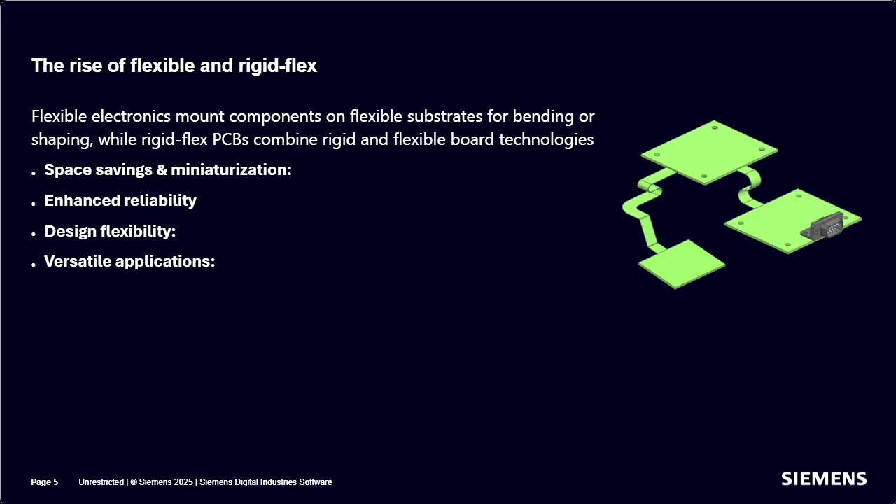This happens to be an area where Siemens has very capable software product offerings. NX, for example, allows for the design of both rigid and flexible printed circuits, enabling the creation of complex electronic systems that combine the benefits of both technologies.

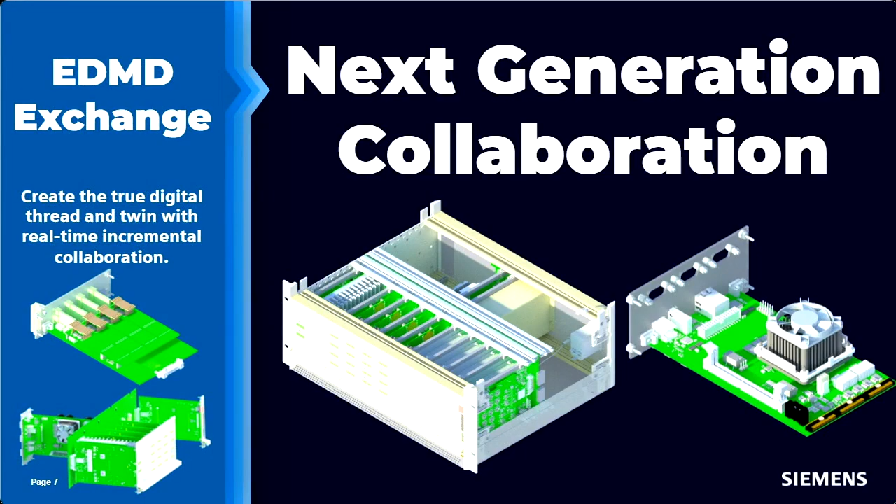And I think the bottom line of all of that is products are getting more complex and need to be tightly packaged. And the way we address that is to make sure that our domains between the electronics and the mechanical world are better integrated. So we asked a question at the start: how do we go from the chaos of not knowing what's going on to a regime where things are understood and everybody has visibility?

So if we do remove the chaos from the process, and I talk about chaos as emails, conversations, screen grabs, post-it notes, we need something to replace it that we can rely upon. So we're introducing EDMD Exchange. But what does that actually mean?

EDMD Exchange refers to the collaboration process between disparate domains, in this case, electronics and mechanics, MCAD. You may have moved on from emails and screen grabs and using historic basic methods such as IDF, but you want to go further, really embrace the connectivity between domains. At the basic level, you have the exchange of the board geometry and component positions. Usually the components are represented by solid blocks. We refer to those as 2.5D blocks.

Maybe you want to see the copper traces on the mechanical side. Take the example of a Bluetooth antenna. Simple copper on the surface of the PCB that's so important to make sure no mechanical components obstruct it. Wouldn't it be great if you could see it while designing the housing? And then 3D models visible in both domains, true representations of mechanical parts in ECAD and electronic components in MCAD. So we have it all, right? Okay, but how does it all fit together?

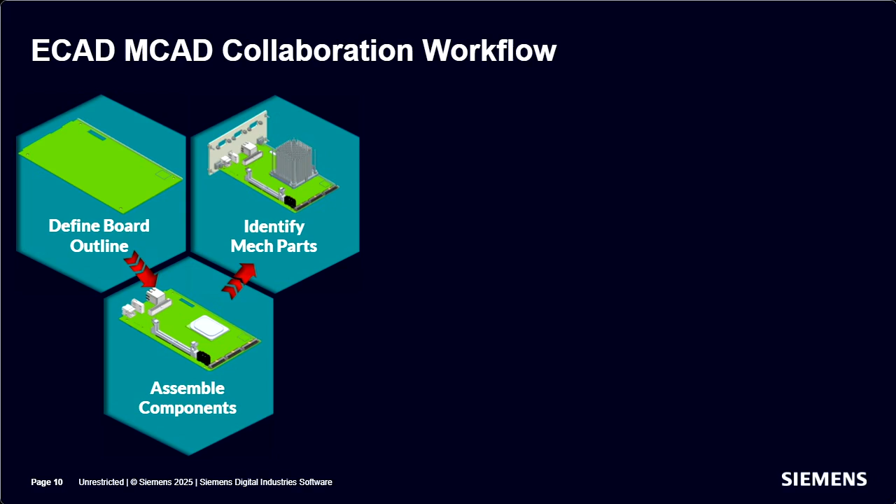So I'm going to take you on a little journey through a typical collaboration process so you get the span of what's going on, and then we'll dive deeper later on into some real-life demos of the actual process. First, we define the board outline. Usually it's recommended that this is done in the MCAD side, but it doesn't have to be. We add the electromechanical components. Generally, these would be those components that define the board interfaces to the product assembly, the enclosure, the connectors and the like. As it's typical design in context, the product assembly already exists, defining the interfaces and constraints for the board. Now it's time to collaborate.

We send a baseline to the ECAD domain and bring along the mechanical components for full visibility in that ECAD domain. The layout designer will add the electronic components defined by the schematic and propose these changes back to MCAD. The mechanical designer now reads these changes, decides if they should be accepted or rejected, and sends back a response of this decision. This part of the process can iterate a number of times until the final design is agreed upon. Iterate now rather than board respin. Once agreed, the final copper traces can be laid down and sent to MCAD. That's the full realization of the design in both domains.

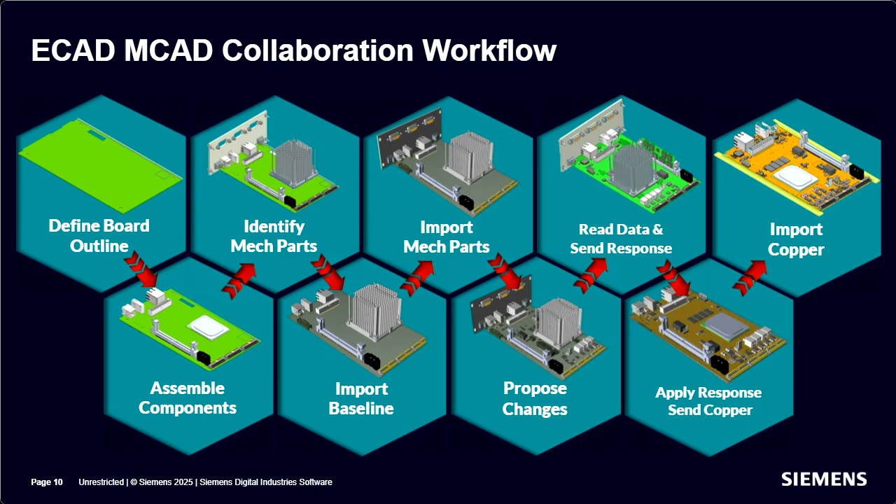So what we're going to do now is take you through a number of different design stages and step through these, starting with the board geometry. And as we go through, we'll reveal what each of the other steps are, but all the while following the process we just saw. Nice animation here. What we're going to do now is take you through a number of demonstrations. And before we jump into that, let's start with the board geometry as the first step there.

So we've got a pretty comprehensive list in terms of the things that we can collaborate on. The board profile, the thickness, the cutouts, and so forth. So there's a lot of capability within the generic design of the board that we can define here to make a very rich data set. You'll notice at the bottom there that we've got flex and rigid flex definition, where we can really define on the mechanical side the true mechanical profile, outline, and thickness, including the stiffeners and adhesives of a flex or rigid flex design before we proceed.

So our first demonstration is going to be about how to create the board geometry. So let's have a look at that. Dave, it feels like time to see this in action.

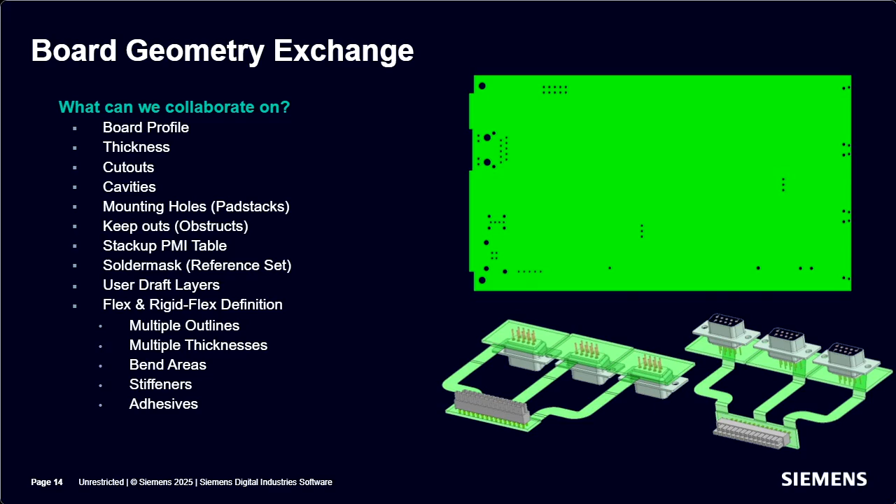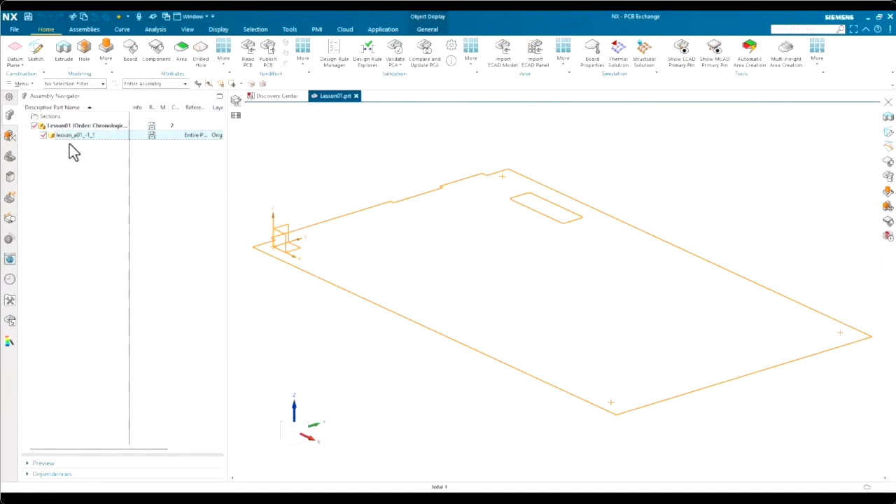Fantastic. Thanks, Greg. Okay, so let's create the board and see exactly what we're going to do there. So what I've got here in NX is a top-level assembly and a board, which is one of the components within there. And I make that the work part, and we can work into this particular area. I've created the board profile just using a sketch, and it's got a cutout and a few other features in there. And we just generate a thickness for this board. We pick the area, we define the thickness, and putting this in the negative Z direction, we want the datum to be on the top surface of the board.

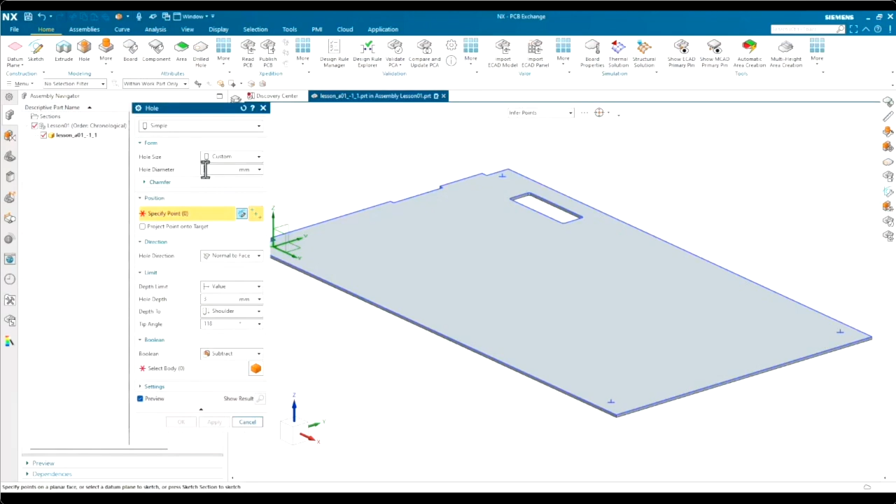Next step, let's put some mounting holes in there. So once I've got a definition here, what I've created is actually linked points from the enclosure. Obviously, you can't see the enclosure in this particular design. And I just generate the hole features for each of those mounting holes. And once those features are complete, we can then start to look at how we tell NX about the aspects of the design for the collaboration.

So the first thing we need to do here is to define the board profile. So what we do here is something called tagging. It's an attribute that's added to the geometry. We pick the coordinate system, which is the orientation that the ECAD designer will see it. And I go on to do the same thing for the holes. I can pick the holes up en masse. I don't have to do them one at a time. And these are non-plated holes for the mounting to the enclosure.

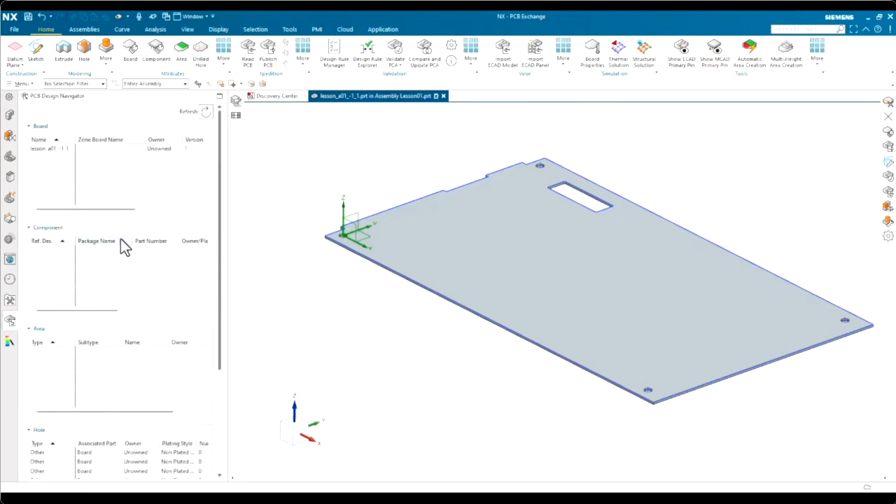So what I've also done here on the next step is that I've generated a couple of sketches, and these represent some no-go areas, some restriction areas, some obstructs, depending on your preference in terminology. And we define these as an area. So I've got a placement obstruct here, which is to prevent any electronic components being placed in that area, and that's communicated to the ECAD side.

I've got a separate area here, which is a special area, and we do some name alignment. And I've got a user draft layer 1, which is a name match to a special area on the ECAD side, such that the ECAD side can understand what to do with that. Greg.

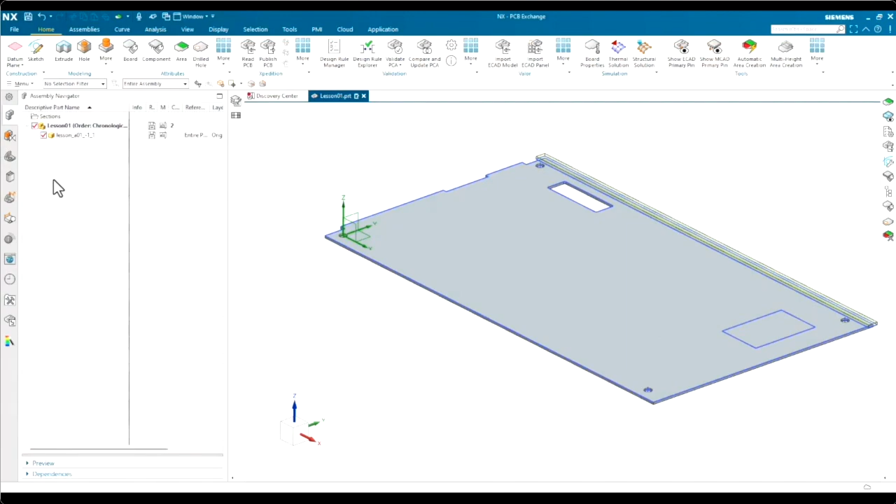Thank you, Dave. You know, watching that there, it really strikes me how easy it is to get your board geometry ready for collaboration. So now we're going to go into the next section, and this section is going to be about the component exchange side of things. But what does component exchange actually mean? Over to you, Dave.

When we talk about exchange, it can mean many things. So let's dig a little deeper. Electronic or ECAD components, so that's ICs, resistors and the like, that's clear. Mechanical cells are a special case item that have a 2D definition that the ECAD designer sees. We then have assembly models which can be pushed across to the ECAD world, and we'll see that later in a demo as well. It gives huge benefits when checking the design for issues on the ECAD side, and so on through the different capabilities to the final one there that's about understanding PCB variants.

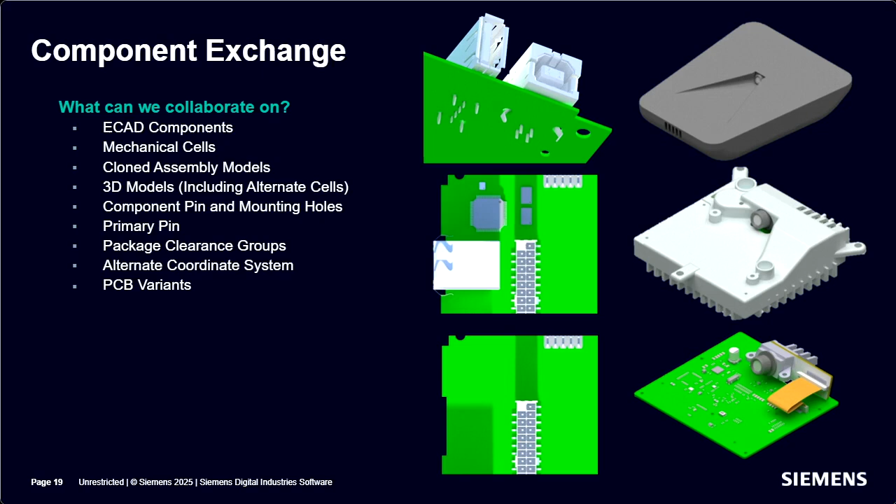In the electronics world, PCB variants are clear for different component fits and do not fits, but to see that on the mechanical side is something truly impressive, and that's something we can also support there. So let's look at a very simple example of placing ECAD components.

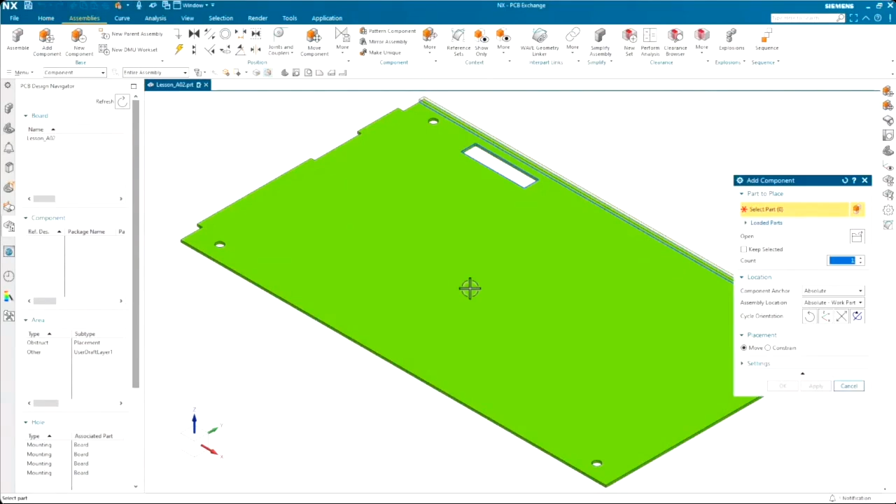So this is the board that we prepared earlier, and it's typical for the MCAD user to place components that interface with a mechanical enclosure and other system components. Using the add component command within NX, in this example, we know the location of the connector specifically, so we can dial in the coordinates. But this doesn't have to be the way that it's always done. We can use constraints and alignment to other mechanical items around.

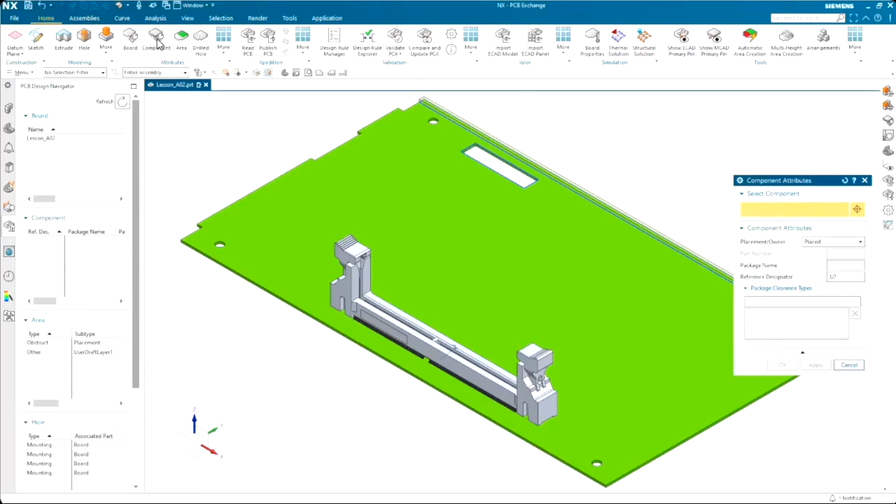Similar to the board and the holes and the areas, we can define the attributes, telling NX and Xpedition what this particular component means. And we define the reference designator as defined on the schematic. We can define ownership to prevent the wrong person from moving it. Package cell outline for clearances can all be added here. And we repeat those steps for each component. There are more automated ways of doing this when the BOM is uploaded to Teamcenter in a managed environment, of course.

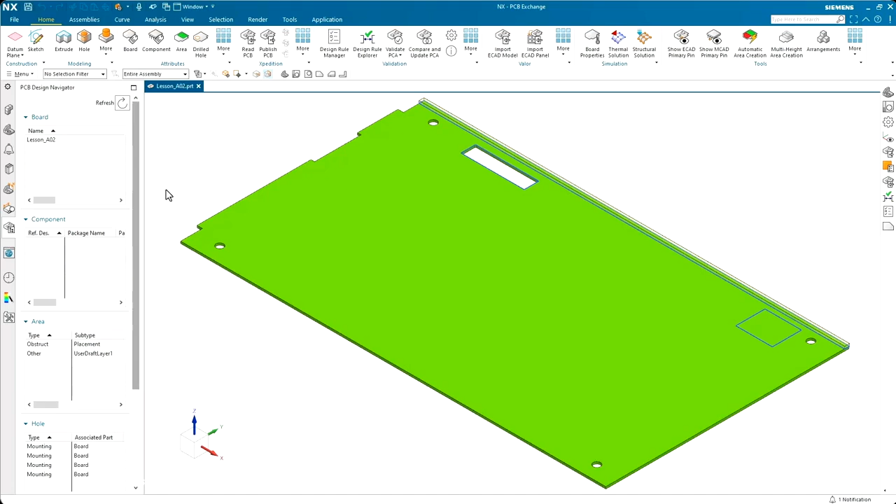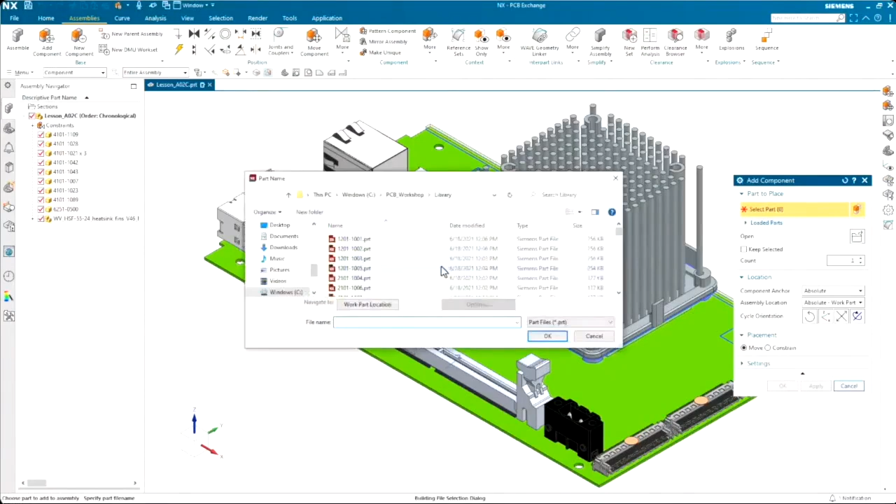So on to component placing assembly models, sorry. So we mentioned about the mechanical components earlier. So we've taken that one connector and added a number of other connectors, and we've got a heat sink there in exactly the same way and identified them. Now we're going to place the mechanical objects. Now, depending on the design constraints, they will already be in place and the board will be dependent on them. But in this particular design, the front panel is attached to the PCB as it runs in on a card guide.

Now, there's no need to add any attributes to the mechanical. NX understands what to do with them and will transfer them to the ECAD domain. Back to you, Greg.

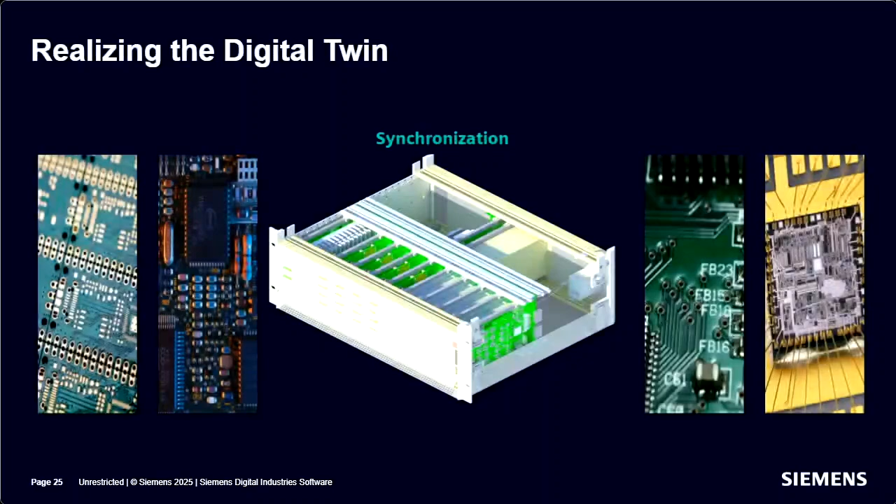Thanks for that, Dave. So we've dug a little bit into detail now in terms of the board creation and how we transfer electronic, mechanical, and even the assembly components between the two domains. But Dave, how do we make sure everything's all in sync as we go through from one side to the other? Right, so let's review that collaboration workflow. The data is synchronized in a process we call co-design. This is a conversation between the two domains using a process of IDX collaboration files that track the history and provide a way to compare and update the design as it evolves.

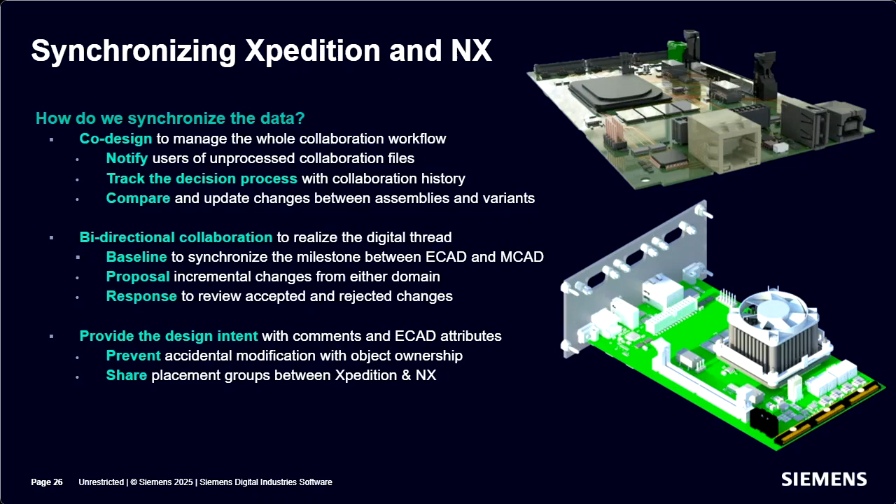The workflow is truly bidirectional, with a concept of baselines to mark the start of the design, followed by proposals and responses as engineers talk to each other through the process of accepting and rejecting changes. With the ability to control ownership, the responsibility for separate aspects of the designs are made clear. And if we dig a little deeper into the Siemens capability, placement groups, for example, are understood in the ECAD world. However, NX is the only MCAD tool capable of understanding and collaborating on this concept. So let's go ahead and create that baseline as we move forward.

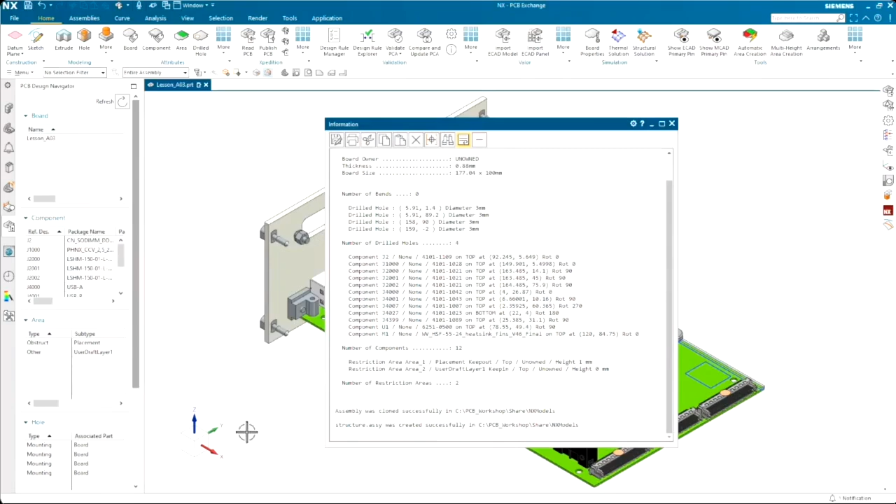We'll take the assembly that we prepared earlier and we'll create the baseline. We choose the file format, the file's name and location, which can be in a managed environment, but here it's just in a native system. And we'll add the option to send the mechanical components. And once complete, the information report can be viewed for successful publication of the data. So we're now going to switch across to taking that baseline information and viewing that inside, in this case, Xpedition in the ECAD world.

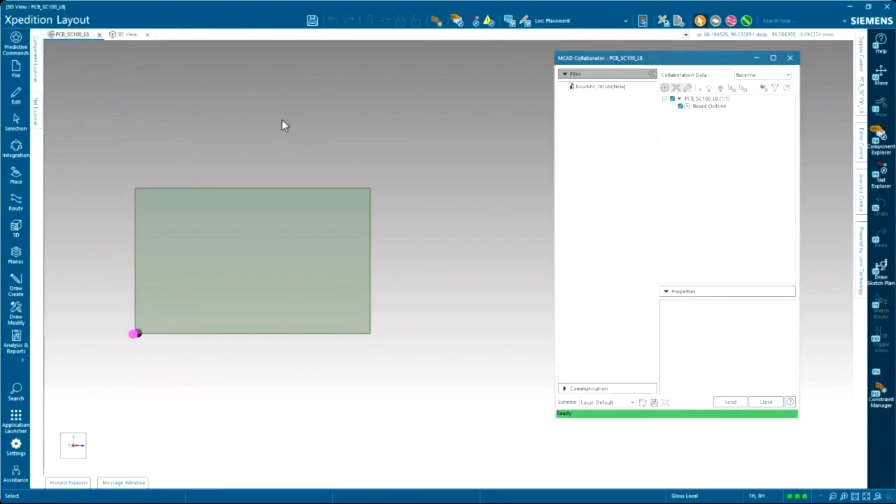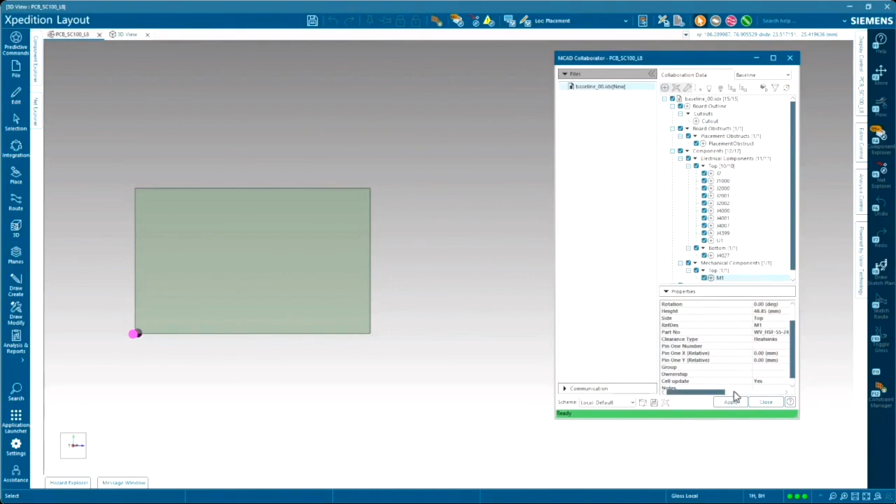So switching gears to the ECAD domain here and take a look inside Xpedition. Using the MCAD collaborator, we can see the contents of the baseline file and review that content. So here in the preview, I can preview the board profile with its image. I can inspect individual components and look at their structure and their definition for each one of the components, the board, the mounting holes, and so on. And this gives us a good insight into the overall design. And when it's applied, we can now see exactly what we had on the MCAD side in the ECAD side. And the baseline communication is complete.

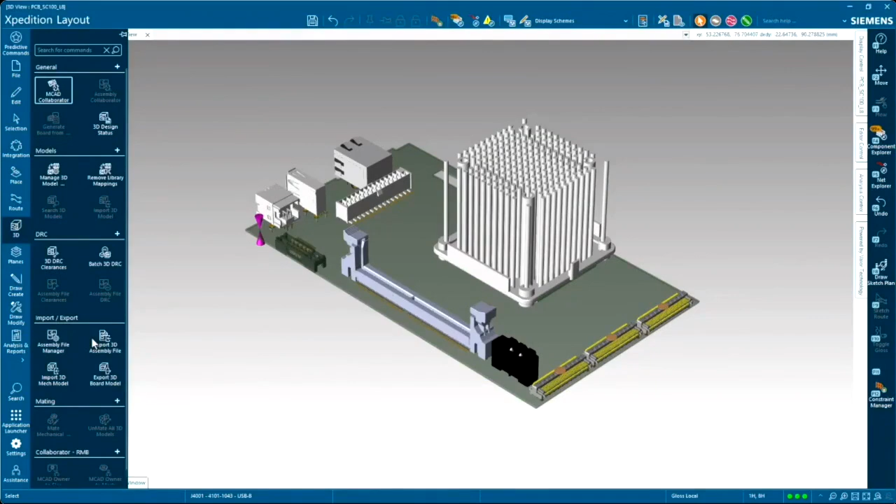Now, we spoke about the mechanical components a little earlier. This is done as a slightly different step. And the way this is done in Xpedition, we load the mechanical items using a load assembly command. When we exported the baseline, we generated this mapping file that says these are the components that you need to introduce into the ECAD world. And you can see there's no moving around or placing or importing of files. We can manage the visibility of those with the assembly manager within Xpedition, and this gives the user the ability to do 3D design rule checking right there on the actual 3D geometry.

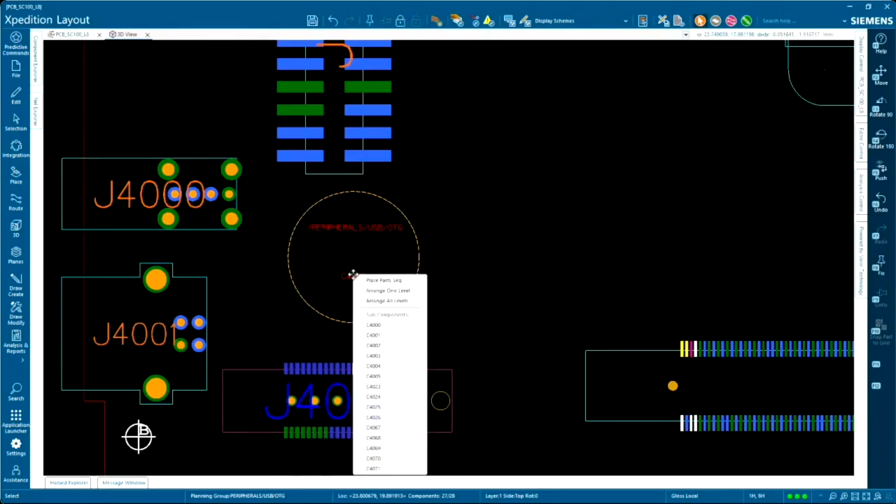So I'm going to carry on now, and on the ECAD side, the hard work starts here for the ECAD designer, where he needs to place the remaining electrical components. And they're placed according to the design. In this quick example, we'll place just a few components rather than the whole design.

Once ready, we can then send a proposal back to NX. And remember, only the changes are sent, not the complete design. The designer chooses what to send, and they wait for a response, or they can continue placing the design if this is an interim send of the information.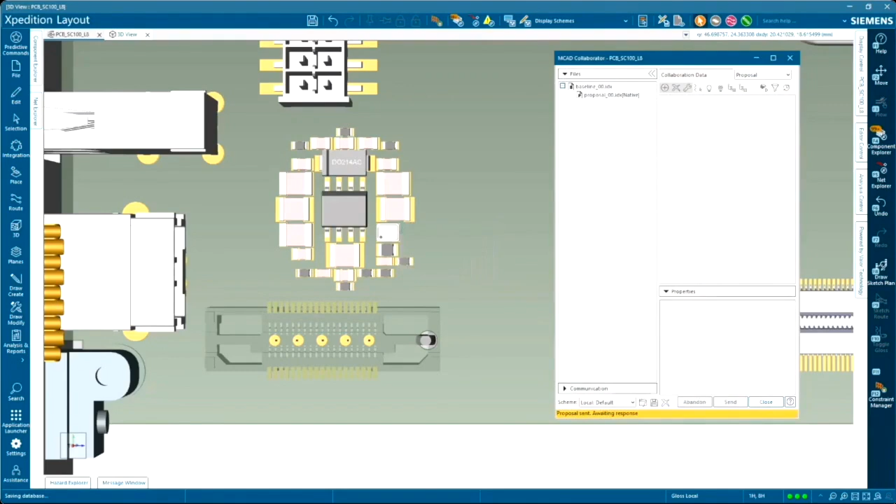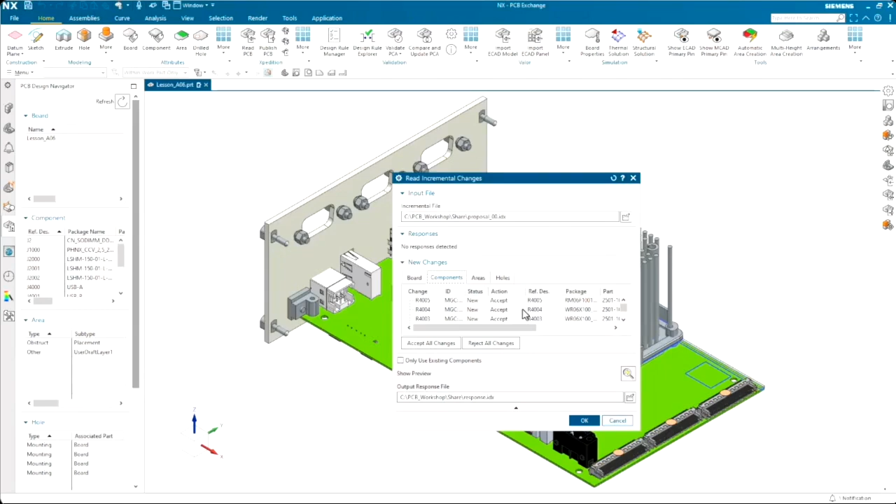Well, once that proposal has been sent, we jump back into NX, and it's simply a case of bringing in that proposal file and reviewing the changes. So when we read that incremental file, we choose the appropriate file. You can see there are board changes, and that's probably due to the layer stack information coming across and changing the thickness. And then we've got all the components, which can be individually accepted or rejected. We're going to accept all of them, pull them in, and you can see those components now.

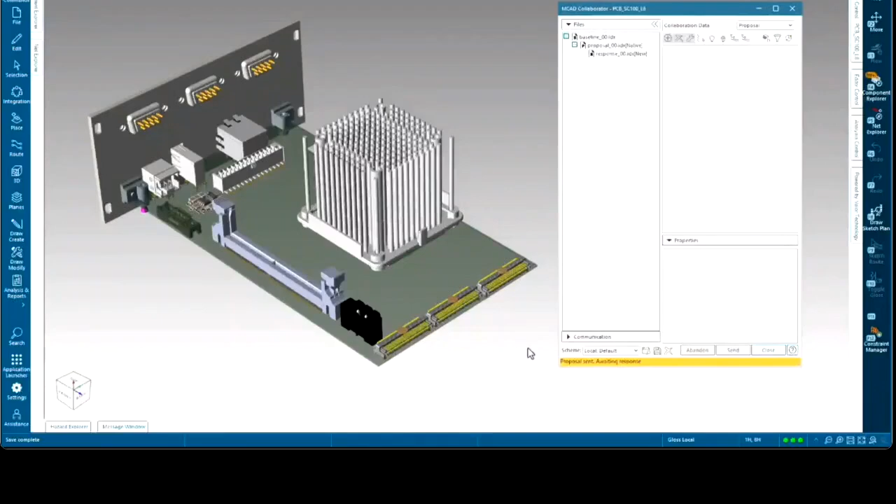And what we've done is we've sent a response file back across to Expedition, who then need to apply that response file to say, I accept that you've received the data and we can now move forward in the process. So we can see in Expedition here, the response file, all of the check marks say the mechanical engineer has accepted his proposal. And once that's applied, the two domains are back in sync and the process can iterate from there. Greg.

Thanks very much, Dave. So hopefully you've seen what we've been talking about here in action right the way through the presentation today. Having the electronics engineer in Expedition being able to see the full mechanical assembly, and if that mechanical assembly changes throughout the design process as that clone assembly data is moved across, it gets updated within Expedition so both sides are in sync. The engineers have the capability to see the changes and keep the design on track.

So moving on to our next segment, we're going to talk about copper exchange. But what does copper exchange actually mean? Back over to you, Dave. Thanks, Greg. Okay, so up to now we've been talking about board profiles and holes and restriction areas and components. But what about the other content?

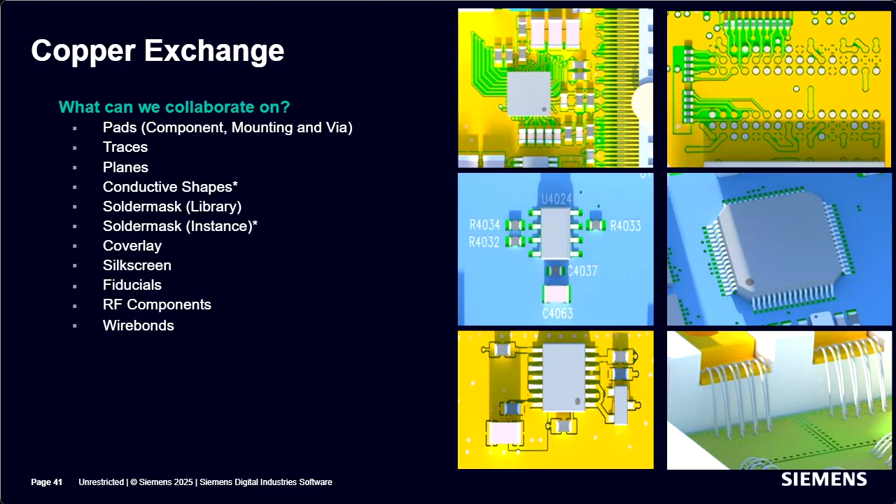NX and Expedition can collaborate on an extended set of object types, some of which are included in the industry standard IDX capability, and some have been layered on top by the Siemens solution. It's not limited to just copper though. Solder mask, cover lay for flex and rigid flex, silk screen, and even wire bonds, as I mentioned earlier, can be added to the collaboration item. Let's take an example. Let's take a look at copper trace collaboration between NX and Expedition.

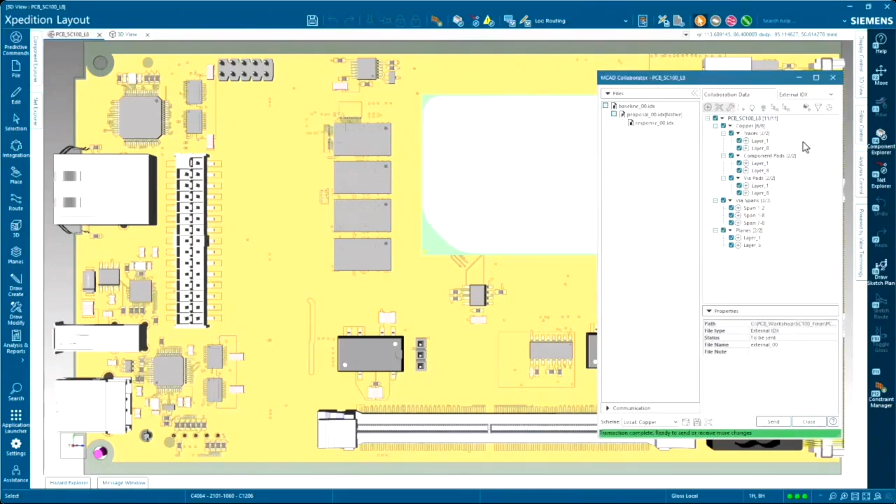So we're going to start on the Expedition side. And what we do is we define the objects to collaborate with. In this example, we're back in the MCAD Collaborator, and we load a different scheme, and we choose the external IDX capability. And we can see we've just got copper items, the traces, the pads, and the vias on the outer layers. And these are sent using the external file type across to NX. So what we do in NX is that we read that information in.

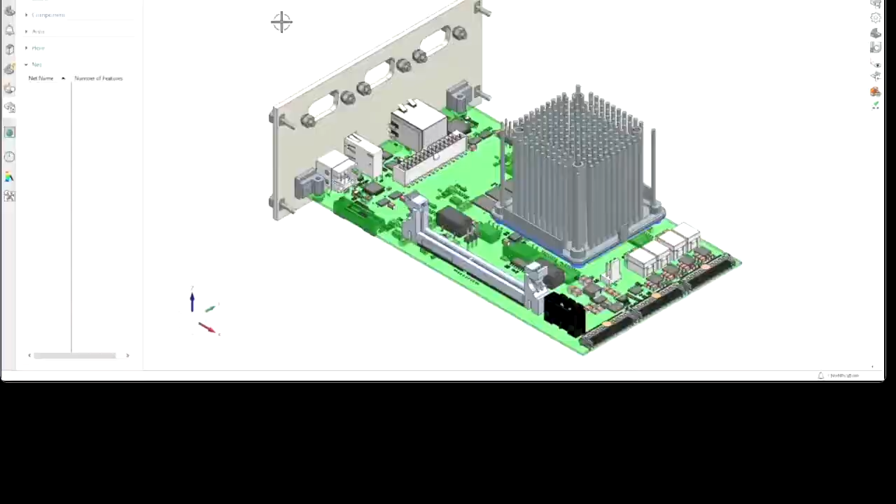Alrighty, so we've gone through the whole process now in terms of the collaboration of the board, the components, the mechanical components, and even now down to the copper traces. So let's just jump into our last segment here and take a look at some of those advanced capabilities. So when we talk about advanced data exchange, when we bring the two domains together, it's not just about collaboration. Although the process of seeing the design truly replicated across both domains is a long way from the chaos we once experienced, we can go further by looking at different aspects of the design.

Electronics generates heat. Greg mentioned this earlier. That's physics. So we have an integration to NX FloEFD for the thermal simulation and analysis. The data we need is provided by the collaboration process from both NX and Expedition. We don't need to create any new data. We just use what we've already got.

I briefly mentioned wire bonds earlier. This is another advanced collaboration item. It's a three-dimensional challenge. Clearly replicated across the domains by our solution, it gives great visibility. And of course, the advanced capability we have in flex and rigid flex collaboration is unrivaled and continuing to develop as we work with our key customers.

What about manufacture and documentation? The typical output for PCB manufacture is now mainly ODB++ format that the ECAD tools generate. NX can read these files and create the full representation of the panel design in NX for validation, and of course downstream use. For example, jigs and fixture design that's pertaining to the panel rather than just the individual PCB.

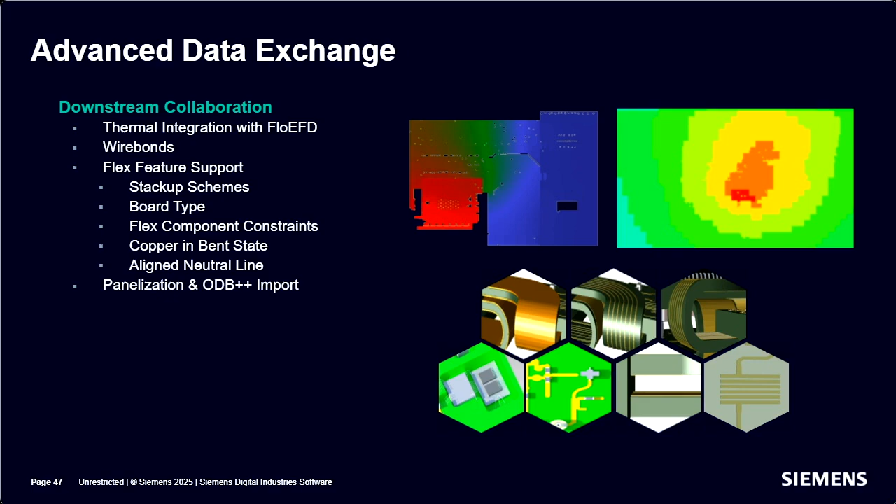Thanks, Dave. So if I just wrap up the session, I think what we've seen today is the powerful integration between the mechanical and the electronic domains that is truly seamless with the Siemens solution there. We can benefit from the efficiencies of the conversation between those domains and reducing the cycle times, and more importantly, reducing the respins. We're sharing data to reduce design costs.

So streamlining the collaboration between the two domains brings a much faster, streamlined method and process, and really gives an insight in one domain about what the other domain is doing right now. And that's important, being able to have a single team working in different disciplines.

And then improved intelligence, the system architecture and integration and the analytical capability between the portfolio of solutions really takes away any concerns you might have and worry about, well, are the tools really doing what we want them to do? It's important that these tools do the job that they're supposed to do, and that they support the design process, and that you're actually succeeding in getting the products out the door by reducing risk.

And as it says, there's real-time decision optimization. Multi-domain collaboration is an area that Siemens is really focused on, and we've been continuously updating. So you'll notice not just today, but in the future, you'll see more and more features being released to help designers through these traditional bottlenecks and help you get ever closer to a seamless collaboration.

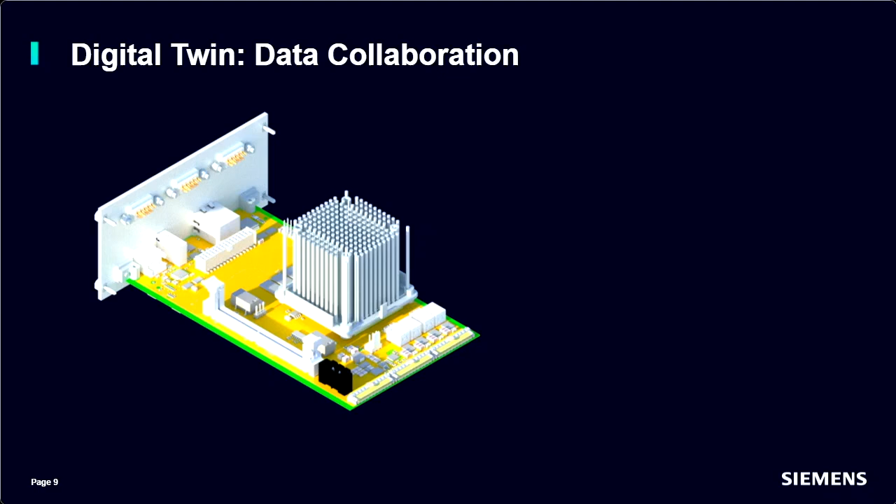Can NX interpret rigid flex designs? Yes, absolutely. I'm just going to switch back to this slide here and just skip through to this area here. So we've got a pretty complex rigid flex design here. The copper traces can track through. We can define the layer stack of the rigid flex.

And what's really important, NX can generate the layer scheme from a corporate standard or a definition and generate the true thicknesses for rigid flex, flatten them out into what is typical for the ECAD user to see, and push that across through the collaboration process. So for interpreting designs, if you have a rigid flex design from Expedition or from another ECAD tool and bring them into NX, we have some import capability and alignment tools that enable us to do that also. So absolutely, yes, we're good to go on rigid flex designs.